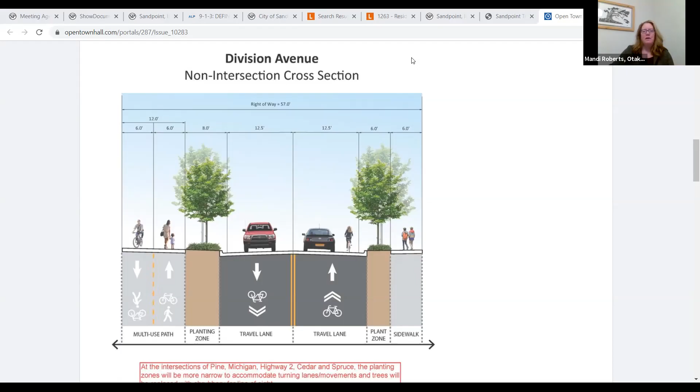There was a road safety audit done, and this was done a little bit separate from the multimodal transportation master plan that we're talking about today, but the recommendations from it are tied into this plan as we talk about it, and that's why it's in our subject today.

It came about through a grant application that Amanda and her team went through, and it came through LHTAC and ITD, and that's how this all came about.

So a road safety audit, click on it here, is kind of a formal process, and it's meant to be that way. It's structured to look at things in an unbiased way and have a mixture of team members from different levels of interest and skill sets to look at this in a holistic way along the corridor.

This just shows the steps that were gone through for the RSA: identifying what the road is, selecting the team, and conducting a pre-audit, which looks at gathering data and plans that have been done along the corridor. And then we do a series of field reviews throughout different times of the day and on separate days to see conditions at various times.

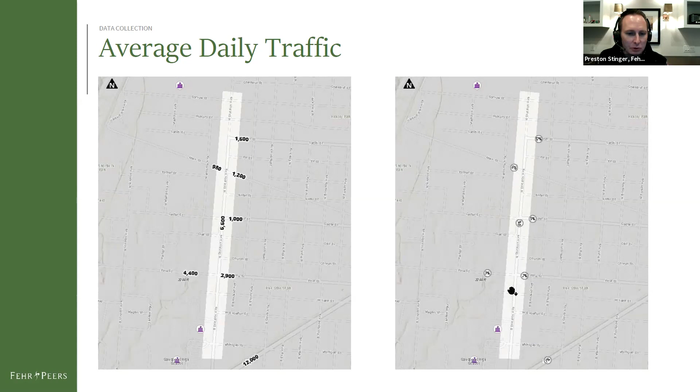And this is a designated truck route for this area because of some of the industrial uses to the north of us. That is recommended to change in the master plan to another route, which will reduce the amount of trucks on this road and get that out of the mix of flow, given the nature of this road is not super conducive to that with the schools in that area.

And then we collected some crash data. This came from ITD's and LHTAC's web-based database, and confirmed by the police department here, which their information gets tied into this data. So it makes sense that they would match.

We have the crash severity, marked by different colors of dots here. A being a serious injury, B being minor injury, and then down to the greens, which are typically just property damage. There were no fatalities in the 5 years we looked at, but there were a couple more serious crashes at those locations.

This is Pine Street, to give you context. So just south of Pine, one at Oak, one north of Alder. The crash types vary throughout the corridor, from rear ends to side swipes to head-ons to angled crashes. There weren't any high clusters of a certain crash type that would indicate a major problem here, just sporadic different types of crashes throughout different areas of the corridor.

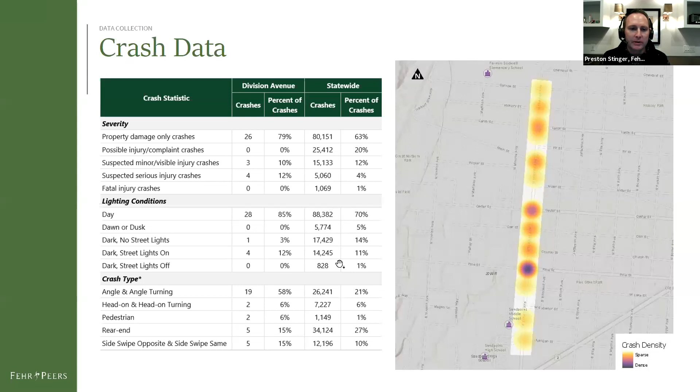All right, let's talk about some observations from our field reviews. These were done at different times of day: early morning before school, during school loading, midday, in the afternoon when school was letting out, during the evening peak commute, and late at night when it's dark. We did it all to capture all different conditions.

He does an outstanding job from our observation—you should be lucky to have him there. I know he has law enforcement background and now serves as a crossing guard, helping direct traffic and keeping kids safe with crossings. Because of that, he really reduces some of the congestion there. He lets cars and buses go, stops pedestrians, then lets pedestrians go, and so forth—he's kind of a traffic controller as well as a crossing guard, and it's working really well there in the morning.

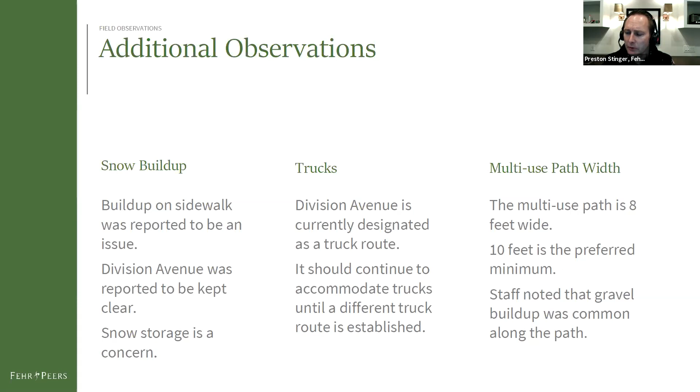We mentioned this being a truck route, and there is a multi-use path that is 8 feet wide. It's a great path, and it seems to be used quite a bit by both pedestrians and bicyclists. You get a mixture of cyclists using both the bike lane and the multi-use path, depending on their comfort level, and that varies by user. Especially in winter when the east side is closed with snow storage, everyone uses that multi-use path, and it's bi-directional, meaning people want to go both directions on it. At 8 feet wide, that's substandard to safely allow two directions of pedestrian and bike traffic. At times there's a lot of gravel buildup on that path, probably from snow storage throughout the year and other maintenance issues.

We checked out the sign reflectivity. Signs have a reflective film on them that makes them show up well at nighttime when your headlights hit them. But with time that wears off due to sun and weather damage, and that reflectivity goes away. We tried to check as many as we could at nighttime with flashlights, and they seem to be pretty adequate from a reflectivity standpoint.

Lane widths vary. Some sections of Division are a 3-lane cross section, one lane in each direction plus a center turn lane, also described as a 2-way left turn lane. Further north it goes back down to 2 lanes, and those lanes are quite wide in some areas, upwards of 14 to 20 feet depending on where you're looking. The wider your lanes get, the faster people feel like they can travel, so it does induce higher speeds in some areas. And then we talked about the cycling part of that already.

So let's talk about some of the recommendations that we have. We broke these up into 3 sections: easy or short-term mitigations that can be done sooner than later, medium or midterm mitigations that can be done a little further down as funding becomes available, and long-term or harder mitigations that take more time, effort, and money to get done, which we'll talk about.

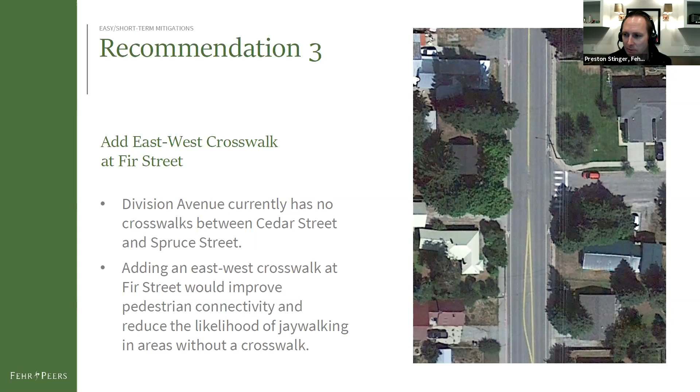We also talked about the speed limit. Today it's marked as 20 miles per hour, in effect from 7:30 until 3:30. To get a little more compliance with that, we recommend it be maintained at 20 miles per hour unless we still see speeding going on, and then we'd recommend changing it to 15 miles per hour. But the more important part of this is the flashing yellow signs, or flashing yellow lights on those signs, which would only be in effect during peak school times.

The crossing guards—there's one up at Spruce Street at that crossing, and one down at Michigan, at least in the morning. Typically what would happen is the crossing guard would have the key to unlock the box to turn on these lights and actuate them, and when they're done, they'd go over and turn them off and lock the box back up. This is a great way to alert drivers that something's different—that this isn't in effect all day long, but only during those peak times when the school kids are active. It brings more compliance to the speed limit and to yielding to pedestrians at crosswalks.

The fifth recommendation addresses the issue at Pine Street where vehicles zoom around the queue of cars to get up to the intersection. That's not a legal movement, and to help fix this problem we recommend restriping that left turn lane. Instead of having a center turn lane used by all users to turn from either side of the street, let's restripe a designated left turn lane for Pine Street. We can extend that storage for left turns back to a further distance so they can get into that lane sooner than they currently can.

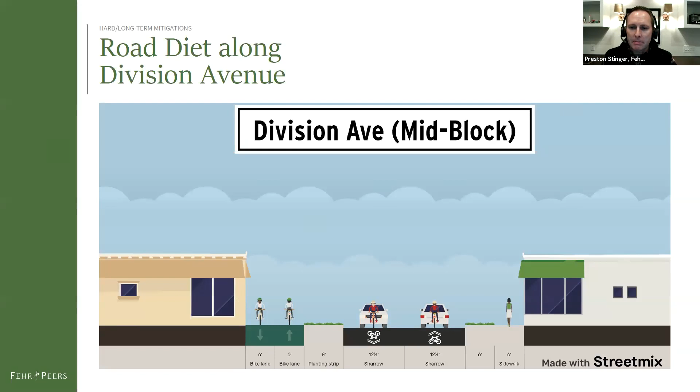Amanda, I'm going to ask you, I know Mandi did some other cross sections that are probably a little better to look at. Sure, would you like me to share my screen? Yeah, if you wouldn't mind. That's not it. Is that the one you're looking for? Yep, that's the one. We can talk about that one first, or either one of those.

So this one is between the intersections on Division. We're recommending a change in cross section, and there's many reasons for this. One is to reduce the width of some of the lanes, because today they vary up into the teens, near 20 feet in some lanes, and that's inducing higher travel speeds. So let's bring those down to a more manageable width that still adequately accommodates vehicles as well as trucks.

We will take out the bike lanes that are there today and put in sharrows. Sharrows are just the stencil painted in the travel lane in the middle of the road, which indicates to the motorist that they are sharing this road with other users, bikes in this case.

For those who are not comfortable riding in the street, which I understand a lot of the school kids probably won't be, we still have the multi-use path, but instead of having an 8-foot multi-use path on the west side of the road, we now have a 12-foot path, which is a typical standard size for a multi-use path with 2 directions of travel. This will be multi-use, meaning pedestrians and bikes share that space.

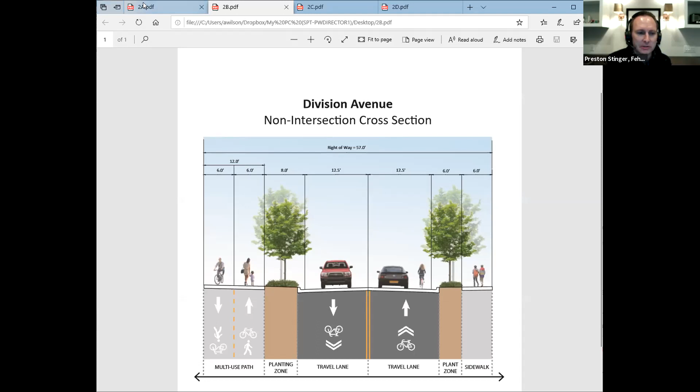As we approach the intersections, the cross section changes slightly. The total right of way stays the same, but we allocate space a little bit differently as we approach that, because we need to accommodate left turn lanes as you come up to those intersections. So to accommodate a left turn lane—think about Pine, for instance, as you approach the Pine Street intersection—we need a left turn lane. You still have your through lane, we still have sharrows there, we still have our multi-use path that's still 12 feet, and we still have our sidewalk that's still 6 feet.

But where we take some width away is in those plant strip areas. So it just narrows down those plant strips as you approach the intersection, and then it goes back out, expanding back to those original widths as you move away from the intersection.

So we talked about the benefits of that. We believe this is a great recommendation in the long term as we find funding to do this, and it's really going to help this be a little more livable of a street—take the trucks off it when we can move the truck route—and make it a little more conducive to a school zone, slow traffic down to some extent, and make it more comfortable for all users. And that's all I've got.

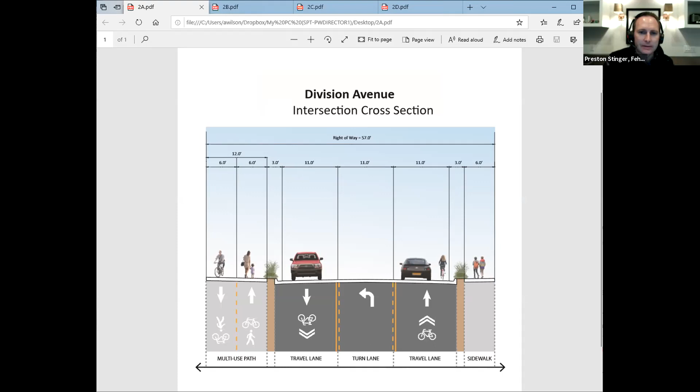That's great, thanks Preston. That's a lot of detail. And I think it might be good, before we move on to talk about the pedestrian and bicycle recommendations, to just see if there's any questions or comments on Division Avenue.

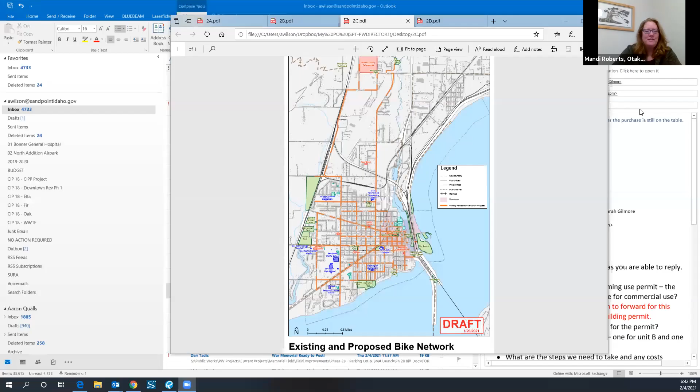Yeah, that's what these next two discussion items are more of, thinking about overall conditions in the city. So not as detailed, probably won't take as long to get through and discuss. But the first one I want to talk about is this idea of designating a priority pedestrian network.

When we first started this project, some of the key issues and considerations we observed, and heard a lot about from community representatives, residents, students and others we engaged with, were that throughout the city there are gaps in pedestrian connectivity and sidewalks on various streets. So there's a need for improvements throughout Sandpoint. Some streets have adequate sidewalks while others have missing gaps or areas that need repairs and updates. However, resources are limited, small town, limited budget to address all of these gaps at once.

So the thinking here is to really zero in on some priority networks that are connected to schools, parks, and other destinations in the community, linking people from neighborhoods to downtown, for example, and then focus investment on improvements and filling in the gaps on these streets first. That doesn't mean that at some point in the future we won't have it completely all done in Sandpoint. That would be a great goal, but this gives us something to focus on in the near term, in the next 15 to 20 years or so, as Amanda mentioned, is the horizon for this plan.

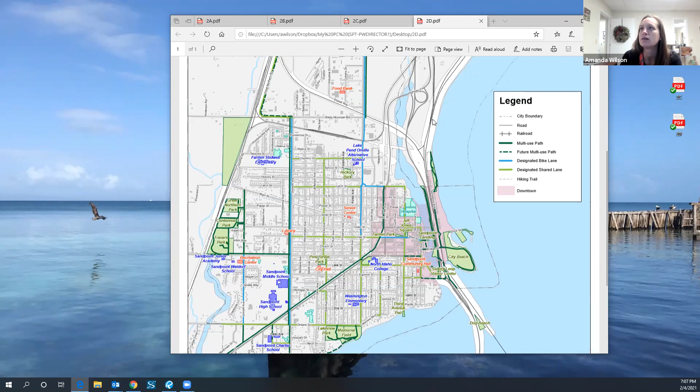I think with that, do we have any other slides here? I don't think so, I think that's really it for tonight. Perfect, there is a question about the width of the multi-use path on Division.

Any other questions or thoughts from folks before we wrap up tonight?